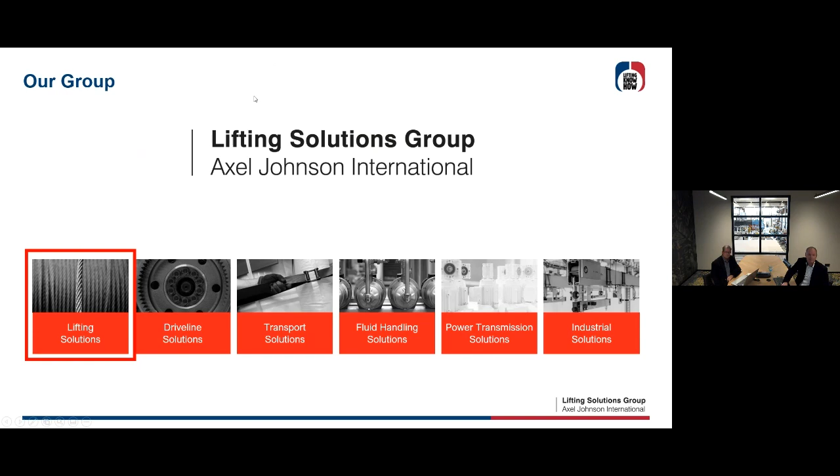What we do: we're a global player specialized in lifting equipment, fall arrest, overhead cranes, etc., and of course services.

We operate as a group, with a lot of local companies, 22 in 20 countries, and around 1,500 employees. We're operating in all kinds of industries, from energy, manufacturing, to construction sectors.

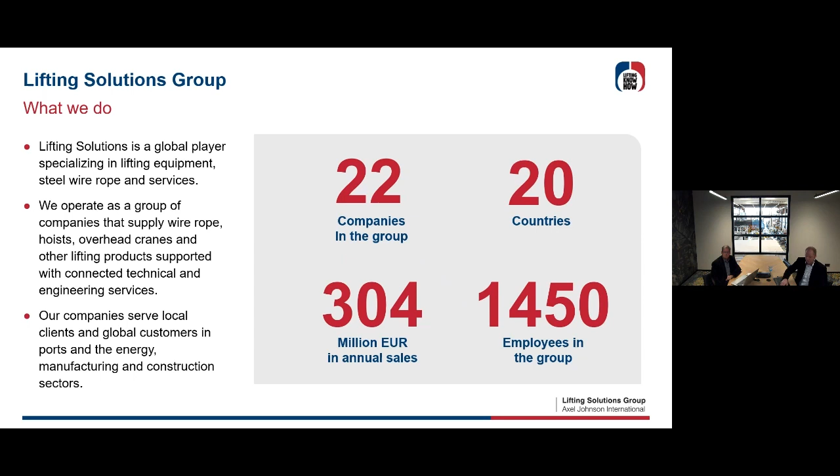It's everywhere. If you see our footprint worldwide, we're mainly operating in Europe and the eastern part of Europe and Russia, but also in the USA, and since shortly, we have 5 companies acquired in Australia.

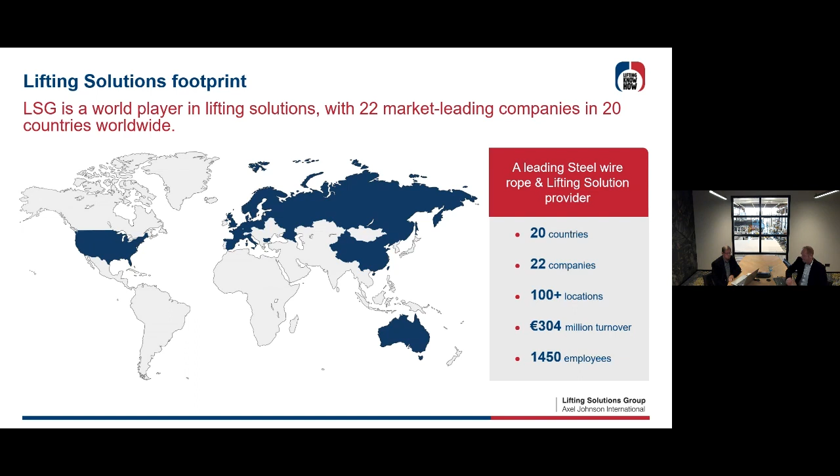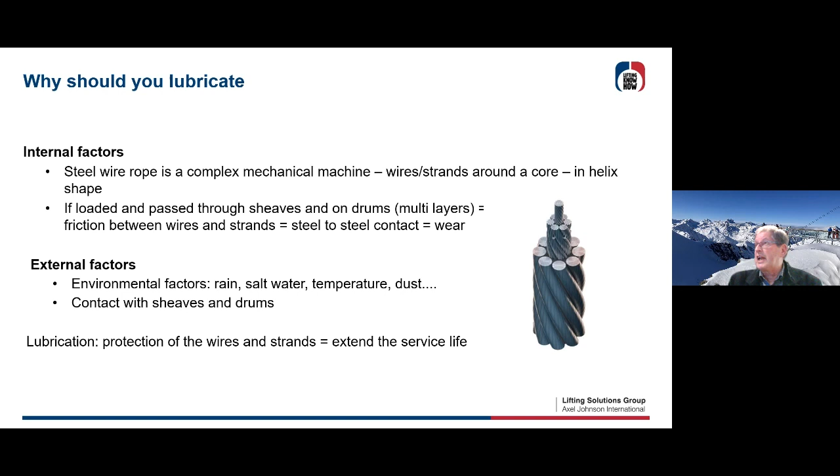So the protection of the wires and strands will give you an extension of the service life - how much and how long it will last longer, we'll see that later on.

So why do you really need to re-lubricate? Because many people say, yeah, but there is already original lubrication in my wire rope. Normally all ropes are lubricated in production. So between the wires in the strands, you should have, from production reasons, already a kind of lubrication between the wires, and sometimes also between the strands.

Why is this? Well, this is necessary for production, because if you just want to make strands and ropes without lubrication, you're going to end up with some wires or strands already fatigued. So you need fluid production, and you need to add some lubrication in the production process. The second reason is conservation in stock.

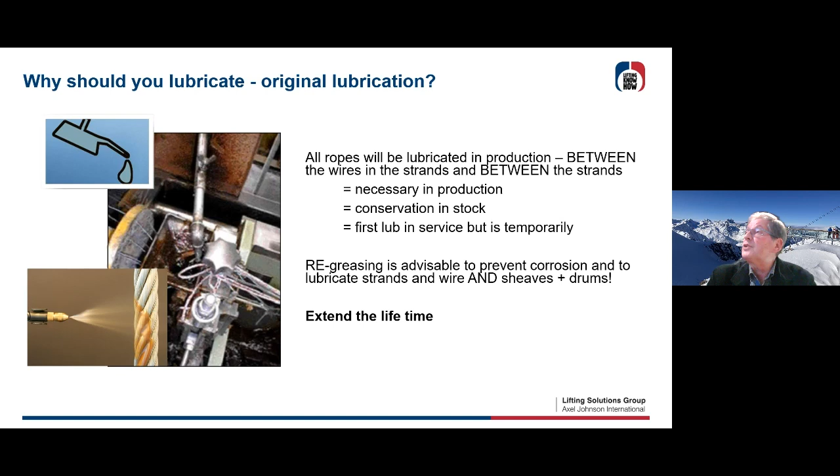But in real applications, you're going to add at least 20 to 30% of your service life. For some applications like elevators, it's going to end up 50%. In other applications, due to certain circumstances, it's going to double up or more. But what is very important is you're also going to have extra profits, because you're going to have less wear on your sheaves and drums, and normally sheaves and drums are more expensive to change than your ropes.

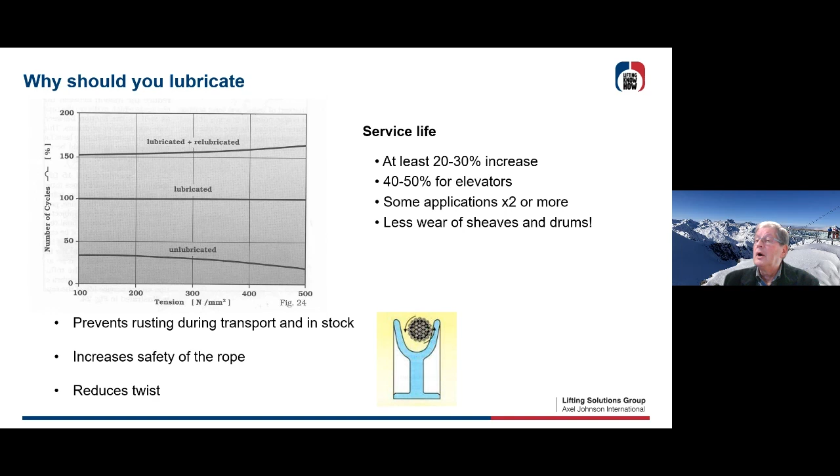What kind of requirements do you want when putting lubricant on steel wire ropes? It must have a very good anti-wear effect, to prevent steel on steel contact. It has to reduce internal friction between the different parts of the rope - your core, your strands, your outer strands, and the wires in the strand. It must penetrate into the strands and the core, re-lubricating the whole steel wire rope.

It has to be stable over a wide, large temperature range. Sometimes there's heat involved in these ropes, let's say 50 or 100 degrees, so it has to be heat resistant. Sometimes it could sustain cold so that the lubricant doesn't get brittle, so that it stays fluid and can lubricate the different parts of your rope.

We need no sticky situation so that sand or dirt will stick to the cable. Sand and dirt could be a disaster when it gets between the strands. So sometimes it's better - don't lubricate with something sticky, because sand will stick to it and your rope will be damaged by the sand between the strands. No sticky thing should be put on your rope.

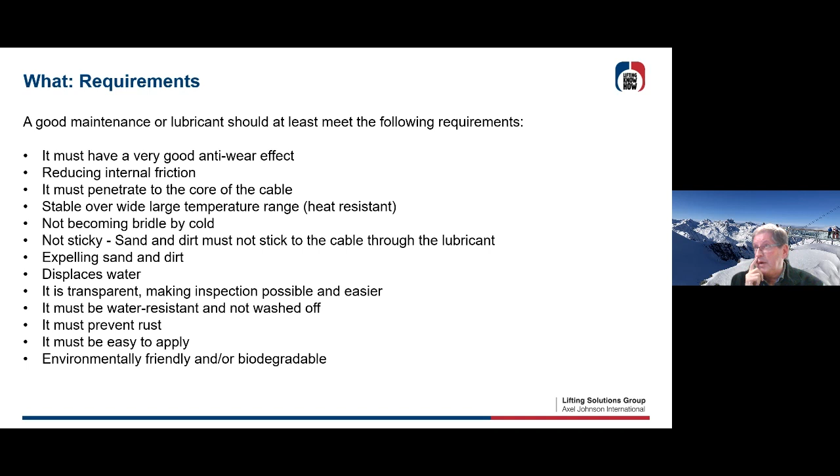There are certain lubricants which will expel sand and dirt out of the rope, or displace water if the rope is in water situations, or from rain. Some lubricants will get into the rope and push the water out, so there will be less rusty situations coming from the rope. I hope that your lubricant will be transparent so that it makes it easier to do inspection of your rope.

So if you use grease, you're not going to see the rope strands or the wires anymore. How are you going to inspect your rope for discard?

So make it transparent. It must be water resistant and not washed off easily. It must prevent rust.

Because if you have a galvanized rope, in the end you're going to have some wear on the outside wire. And if the galvanized layer is gone due to wear, then you could have a rusty situation or a rope looking a little bit rusty. If you use lubricant on that, that will prevent rusting further on.

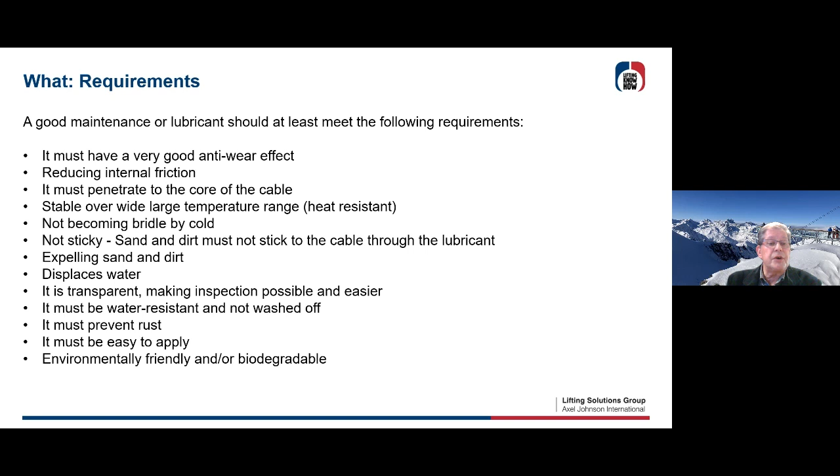And then it must be easy applicable, so not taking hours or days to lubricate a rope. We're gonna focus on that later on. And if possible, environmentally friendly or biodegradable, so that it doesn't hurt the nature, the environment.

For some steel wire ropes who really have an application in water, fresh water or salty, where you have the specific requirements for offshore installations, there are some lubricants which will seal off the cable to prevent water getting in.

If you need to have wire ropes running underwater or in salty sea water, it will protect against corrosion. It has some polar properties in relation to galvanized steel, so that the lubricant won't drop off.

In a water situation where you have extreme loads, it must not wash off in the seawater, it must be completely water resistant, so that if you have lubricated, that water will be thrown away from your rope.

And of course, again, environmentally friendly lubricants coming up for the last 10 or 15 years, very important. We talk about this later in sustainability.

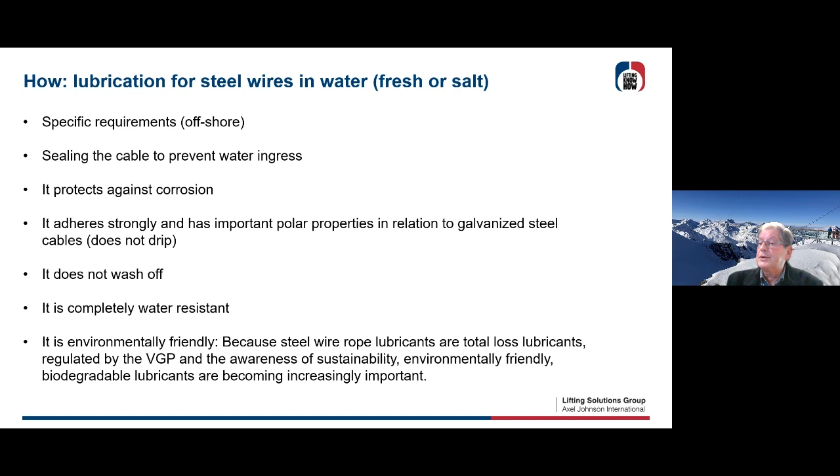How many times should you lubricate? Well, for me, it's easy: when the rope is dry. So steel wire ropes need regular lubricated maintenance.

You have this deformation in the cable, in sheaves, you have forces, and you can be certain that your original grease will disappear, it will get out of the rope. So you need to replace it with another grease or oil.

So don't ask me how many times, because I say when it is dry, but of course it depends on your type of application, your conditions, indoor, outside.

Underwater, in dusty environments with sand or seawater, it also depends on the type of cable. If you have 6-strand or 8-strand or compacted strands, or these kind of wire ropes with plastic infill.

So they don't need a lot of relubrication. That is an advantage. It also depends on the loads.

If the rope is really loaded every time to, let's say, 100% of the safe working load, then lubrication will go out faster, so then you need to lubricate more often.

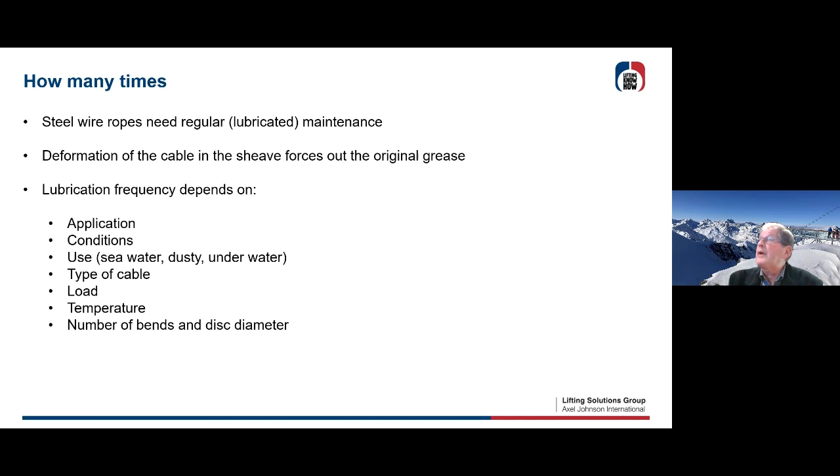And of course also on the number of bends, if you have a lot of sheaves in your application, depending on the diameter of your sheaves or drums, perhaps you're going to need more relubrication.

You can look the regulations up in the norm, which is mentioned there. In summary, you have an indication about lubricating at regular intervals, whether you need to do it every month or every 6 months and so on, depending on how often you use the wire rope.

If the wire rope was out of service, for some months or sometimes for some years due to standstill, then you normally need, before using the installation again, to lubricate a little bit.

And especially in these areas where you have bending loads, you need to look where to lubricate first. You lubricate the rope which goes through sheaves onto drums. So perhaps if you don't have time, or you're not able to lubricate the whole rope, the whole length, just look at the areas where you have the most bendings.

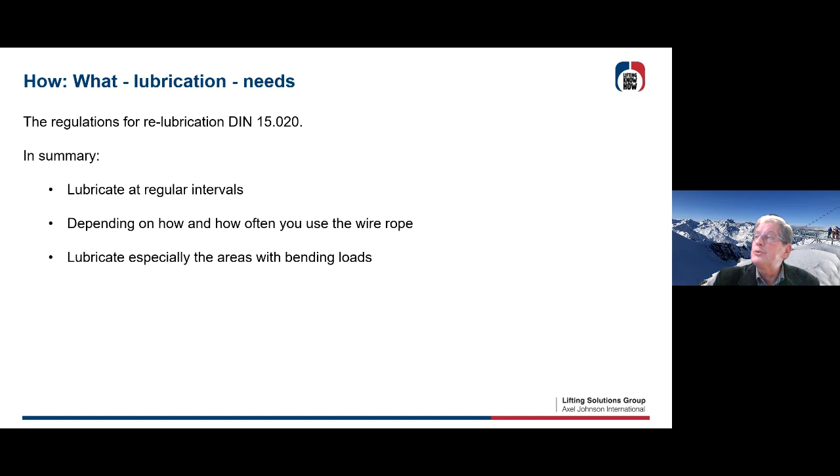It's a Coca-Cola type of oil. You spray it on, and then it will enter the strands, it will enter till the core. You leave it on for about 30 minutes, and you touch the wire, and you're going to feel it's not sticky.

The oil has entered into the strands, and it gives you a water resistant or water expelling situation on the outside. And you can see that the different wires are visible for inspection, so there is no dirt, you can look at the rope. It will be oiled, I could say greased, but it's no grease, it's not a sticky rope. You can also do some dripping or swabbing.

Preferably, you do it where the rope is bent on the sheaves, or you spray it on the drum. So all of the rope, just put it on the drum or on different layers on the drum, and you spray, drip, swab, or brush it all over your drum.

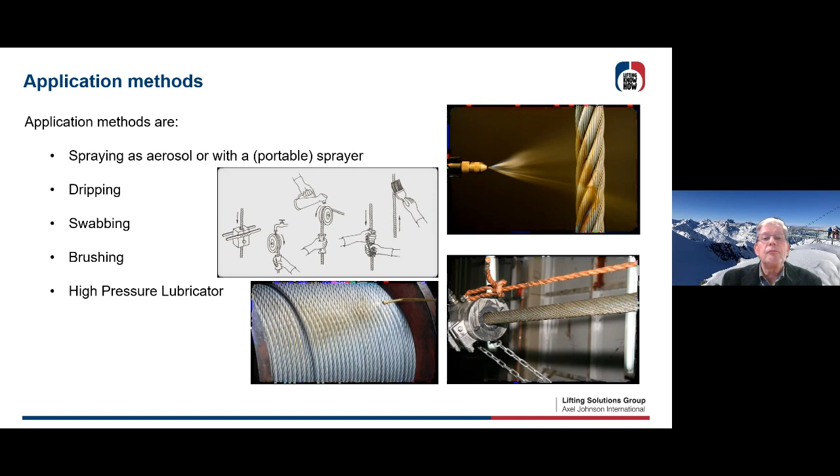For some applications, you can also use a high pressure lubricator system. This kind of machinery is where the rope is completely greased or re-greased under pressure. You have these different possibilities, different brands, but you can see on the bottom there, it gives you a really thorough lubrication, and the rope will look like this when it comes out of these shells.

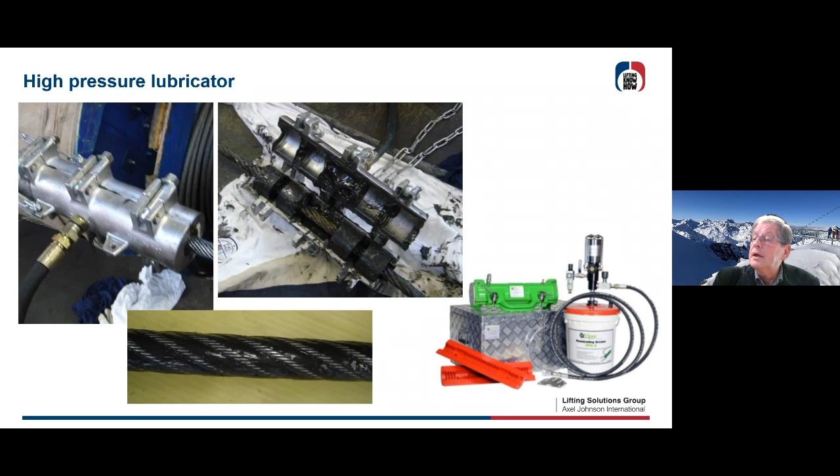The amount of lubricant needed depends on the application, of course, but this is a formula I normally advise. You should take the rope weight per meter, multiply it by the length, so the kilos on rope you have, take 1% of it, and put that as liters or kilograms on your rope. So 1% of the wire rope weight.

If you have ropes with plastic infill, take half of it, so half a percentage will do the job. That's about my advice. You could also listen to the guys selling the lubricant, and they will double or triple it because they want to sell liters or kilograms. So it's better to stay at 1% or 0.5%. That'll do the job. It's not an advantage to put too much lubricant on the rope.

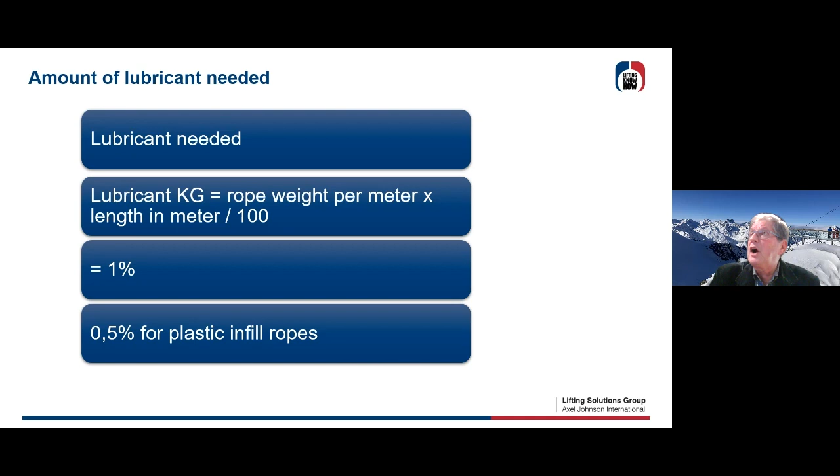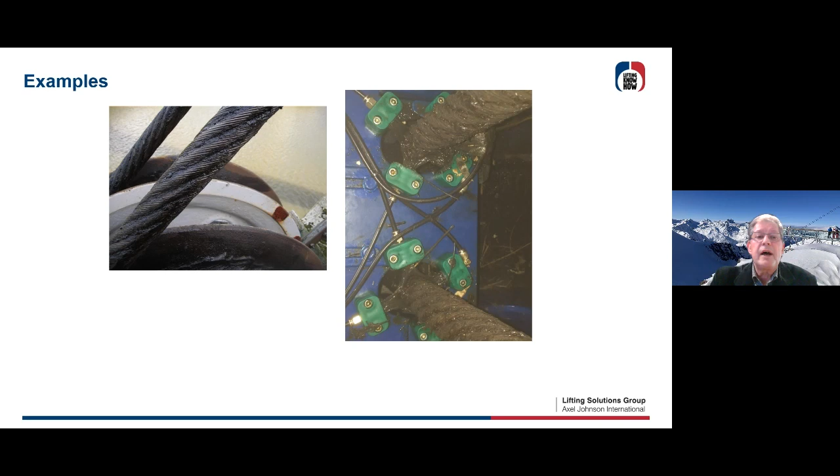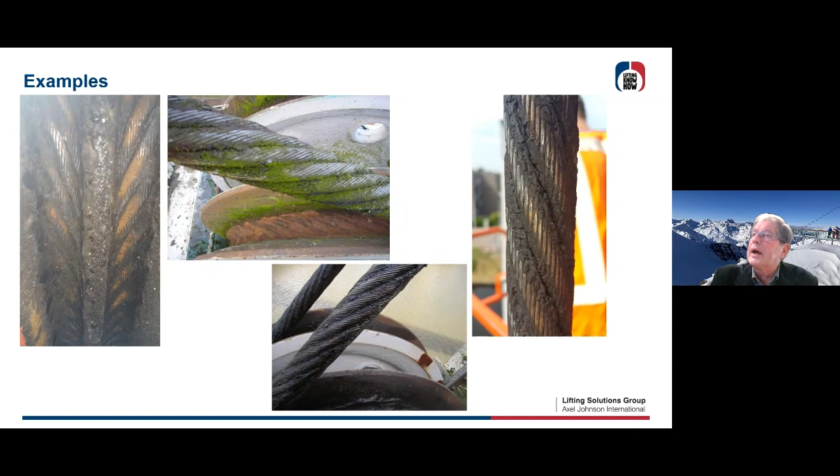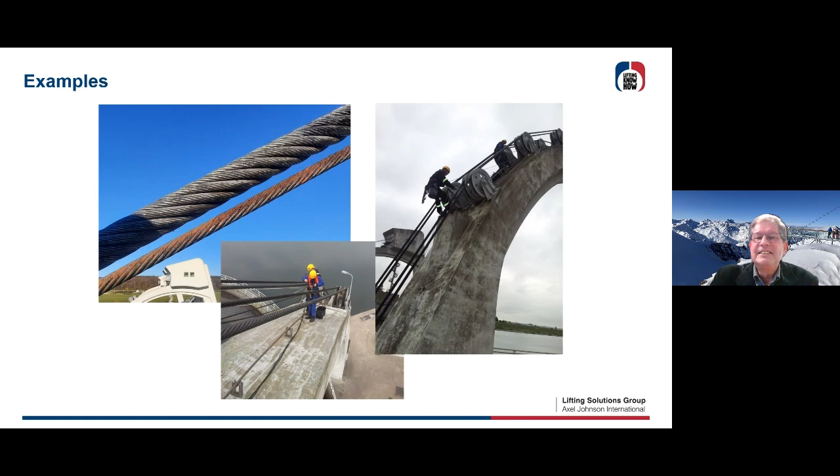Some more examples. Ropes which stay on locks like this. You see the rope is very dry, and there could also be a little rusty situation beginning there. You see the guys relubricating the rope there. It's a nice job to do, but you need to do it.

If you open up a rope there on the left, you can see at the outside the original lubricant which comes into the rope from the factory. But if you open up a new rope, you could see on the inside if there is still the original lubrication.

The other pictures are ropes on some applications I saw where I really advised the clients to do lubrication. On the left, you have this situation where you have socketed the rope. If you're socketing a rope, you need to completely get the lubricant out of the different wires, otherwise you don't have a good socketing process. So it's very important to re-lubricate from the beginning underneath the socket, because there the strands are going to be degreased due to the socketing process. If you don't do that, you see that rust will appear just under the socket.

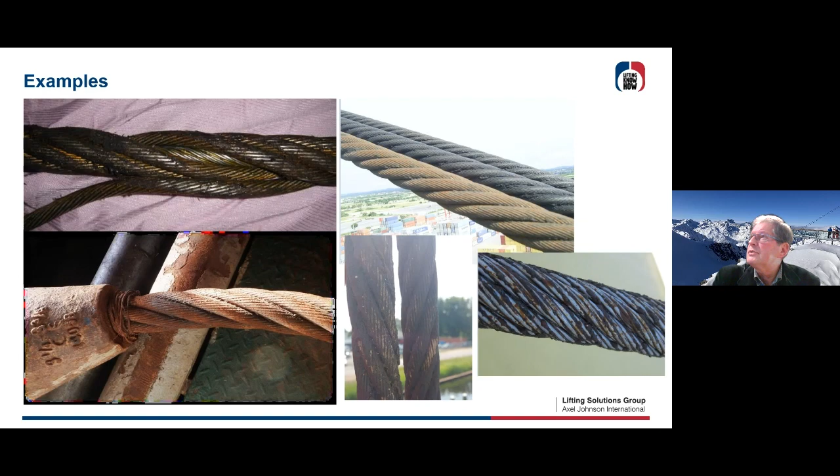On the right, you see rusty situations coming from a little damage to the outer wires in galvanized rope. So lubricate, lubricate. And then I end up with: don't lubricate heavily corroded ropes.

So if your rope is completely rusted, then the situation is that into the strands and into the different wires, these wires are so corroded that they are connected to one another. The rope will hold due to the increase of friction between these different wires. And if you're going to add lubrication, this whole situation will loosen up. So big accidents can happen, your cable can break automatically, if you re-lubricate a completely corroded rope.

If you see corroded cables, you're going to end up with only 1/5 of your lifetime. So it's too late then.

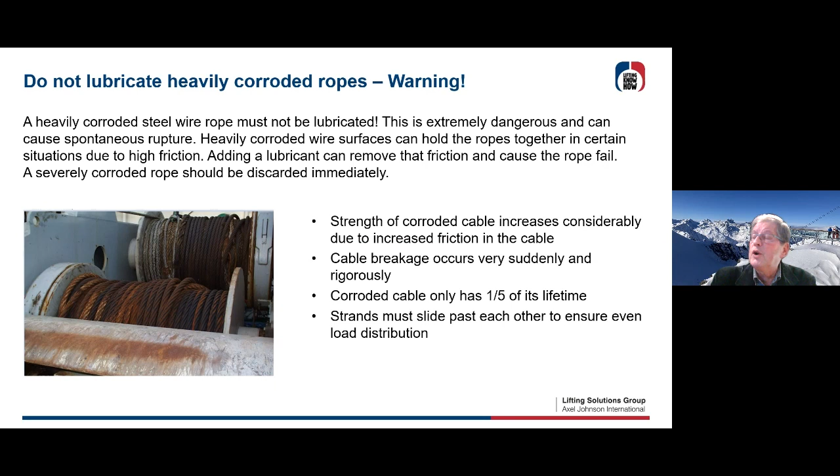The strands must slide past each other to ensure even load distribution. Sometimes you're going to see that rusted, completely corroded ropes are only pulling on 2, 3, or 4 strands, so there will be an uneven load distribution in your rope. Heavily corroded ropes, be careful, you're going to loosen up all the different parts. So don't re-lubricate very corroded ropes, but change them.

Well, that's it. I'm interested in your questions, we're going to tackle those in 10 minutes.

And now we go to Ellen. Eileen, sorry, I'm Ellen, but this is my twin sister. Yeah, exactly, thank you so much, Elaine. She's going to say something. Okay, all right, thank you so much.

My name is Elin Letterblad, as I pronounce it in Swedish at least, and I am the Sustainability Manager for the Lifting Solutions, and I've been working for Axel Johnson International since 2013. And I'm here to talk about the sustainability aspects of lubrication and how we can reduce the environmental footprint by the use of lubrications.

My dear colleague here has already mentioned those two very important aspects, because in the world of steel wire ropes, lubrication is contributing positively in especially two aspects of sustainability. First of all, lubrication is prolonging or extending the lifetime of the rope, which is of course a great advantage in the sustainability area.

In the sustainable world, we want to develop circular business models or circular material streams, and by extending the lifetime of the products, we are really contributing to that. The opposite to a circular business model is the linear one, where we produce, we use, and then just dispose of it. But in the circular one, we are focusing on keeping the raw material and the products we have produced as long as possible. So that is a really good advantage by lubrication and taking care of your steel wire ropes.

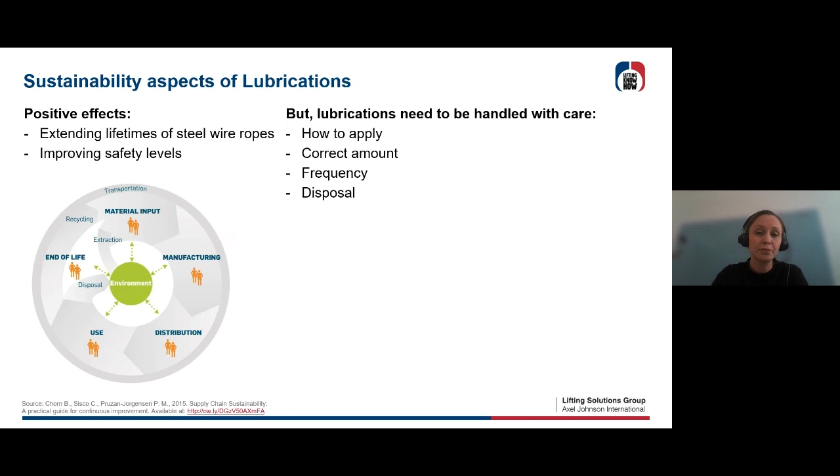And if you're not sure about those things, I really recommend you to contact a professional. And then we can move over to the next slide, please.

Although there are challenges with lubrications, there are actually better environmental choices of lubrications on the market. Priority number one is, of course, that the lubrication should be fit for its purpose. But thanks to, among others, the increasing oil prices and the increased environmental considerations to avoid negative effects of the spillage of lubrication, that has really led to the development of new and less environmentally harmful lubrications.

So today there are a set of lubrications considered environmentally accepted lubrications, called EALs. And those need to fulfill a set of requirements, which means that they are more biodegradable, they have a certain level of renewable content, and they are less toxic and non-bioaccumulative.

Some vendors of lubrications have either internal self-certifications to ensure the fulfillment of EAL, but there are also labeling programs and third-party certifications. Some examples are Blue Angel, European Eco Label, the Nordic Swan, the Swedish standards, and so on. So that's something that could be worth looking for when choosing lubrication as well.

So this was actually just a very short introduction of the environmental and sustainability aspects of lubrication. And to summarize, the positive effects are really winning over the negatives, mainly thanks to the capacity of prolonging or extending the lifetime of the steel wire ropes.